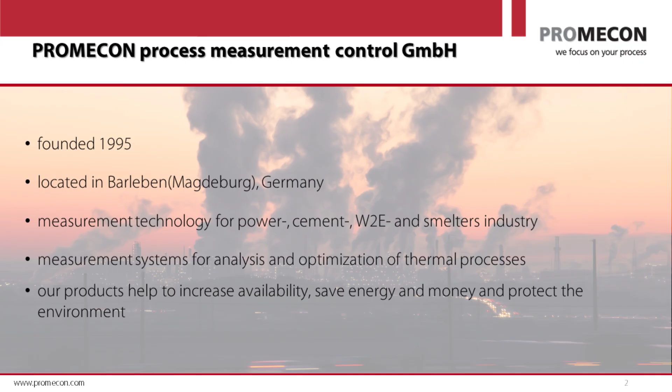Let me give you a complete overview of the industries that we're working in. It's power generation, waste to energy. Then in steel and iron making, we are into BOF, EAF, but also sintering and dedusting of plants. Then a very big part of cement making and limestone. And then, of course, the whole non-ferrous sector, lead, zinc, copper, whatever you name it. So it's a very wide field where we are active.

Today, I'm talking about digital, drift-free vector airflow measurement. Before we go on, we really need to recap a little bit on these three words: digital, drift-free, and vector. All three things are very important for your process, and I will explain why.

Before we do that, let's just have a quick look at a boiler. Boilers are very large machines. They're probably one of the biggest machines for energy conversion that I know. You can have boilers up to 100 meters tall, and these boilers are very prone to maldistribution of the airflows, which is used to combust the coal.

So you have a huge boiler, you measure your O2 at the back end, but what does it mean for the combustion chamber, which can be as big as a large room? You have 20 burners, several burner rows, and the air distribution across the burner rows is very uneven.

And with that come all the problems that you have in combustion: high CO, at the very same time high NOx, maldistribution of heat, pipe leakages, slagging, eyebrows, flame impingement, you name it. All the issues that you have in your boiler come from this problem. Even if you have clinkering coal in the bottom of your boiler coming from your mills, it can be as simple as a primary airflow problem, because the coal is not pushed through your pipes at sufficient velocity. So all the issues that you have in your boiler are driven by air maldistribution.

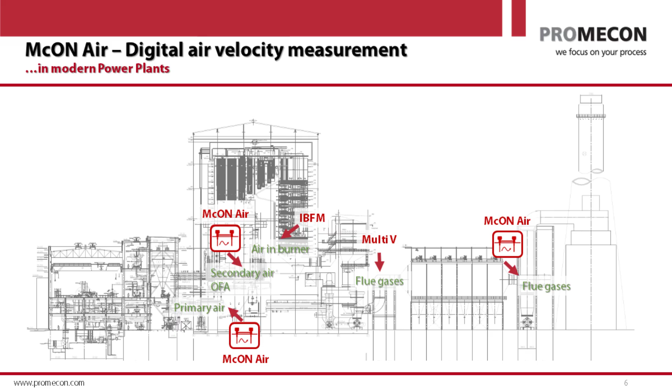So the next question is, why do people have such a problem with managing their airflow correctly? Well, the big issue here is that the airflows you are measuring are usually measured by a delta P device, a so-called delta pressure measurement.

And before we look into that and the problems, I would like to point out how the air and the process gas is processed in your plant. Everybody knows it, but it's important to look at this example again. All of the large boilers usually have a rotary air heater. The rotary air heater is basically shoveling the heat from the flue gas back into the fresh air. So a big portion of the heat that you would lose on the flue gas is put back into the fresh air stream by the rotary air heater.

The rotary air heater is a big carousel. It contains a lot of metal plates with thermal mass. So if the hot flue gas goes by these metal plates, it heats them up. And as this rotary air heater is slowly rotating like a carousel, the hot plates finally reach into the cold zone where they lose the heat again, and the cold fresh air is heated up.

During that process, the metal plates also agglomerate ash, so they are full of ash. And as the rotary air heater turns into the cold air zone, this ash is released, and therefore the ash is flying through the ducts now as preheated air. So the preheated air always contains ash originating from the rotary air heater. And as you can see, it has nothing to do with the leakage of the air heater, because the leakage goes from the fresh air side to the flue gas, from the pressurized to the negative pressure side, whereas the ash goes the opposite way. It simply always goes from the flue gas into the fresh air side.

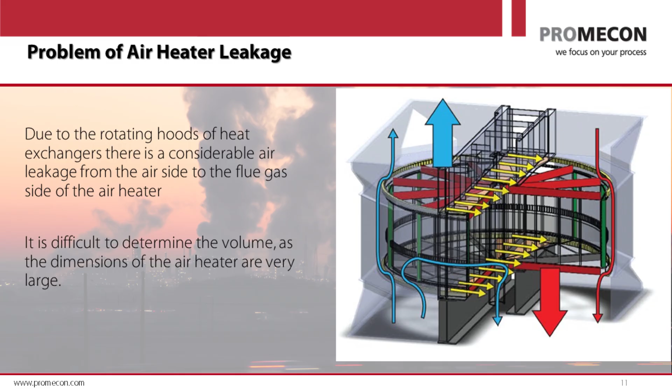So what you have is airflow with ash. And in some markets, such as India or South Africa, you have quite a lot of ash in your air because your coal contains so much ash. You can have coal with ash content of 30-40%, and then, of course, you have a lot of ash in your air. But even with coal of lower ash content, you will always end up with ash in your air.

What happens if you look at this is a typical airflow device, like you see it in hundreds, if not thousands, of coal-fired boilers around the world. It's an obstruction, in this case a venturi, but it could also be an airfoil, it could be an orifice, some obstruction in the duct which will create a pressure drop. And this pressure drop is then subsequently measured by a DP transmitter.

So you have a venturi, for example, or an airfoil. This creates a delta pressure, and you measure that delta pressure by two impulse lines, one before the venturi and one inside the venturi or inside the airfoil. The delta pressure is not very large, about 20 millibar or a few inches of water gauge. So we're talking here very small pressures.

Now, why is this important? Well, you take this pressure and according to the law of Bernoulli, you take the square root of the pressure and that is proportional to your flow. And you put this value into your controller, and the controller then controls the louver dampers so that your set point of airflow is reached.

So somebody puts in a set point, let's say 25,000 norm cubic meters per hour, and then the controller looks at the DP measurement and calculates the flow, and then changes the louver damper until the correct flow is reached. And that is a very important point, because that prevents the operator from seeing whether the DP transmitter is correct or whether it's drifting. An operator cannot see that because the controller will always correct the flow value to the set point. Now, why should the DP transmitter drift in the first place?

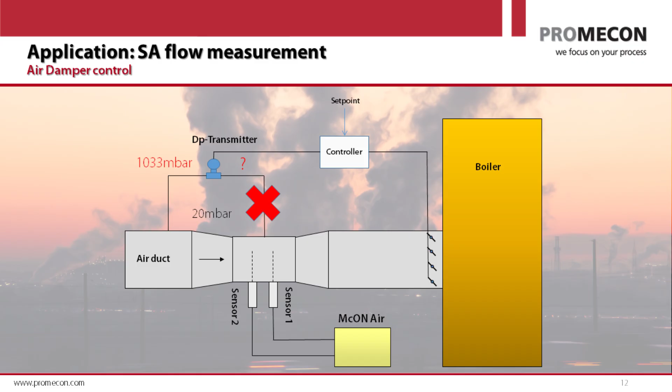Let me show you an example how this looks live with live data.

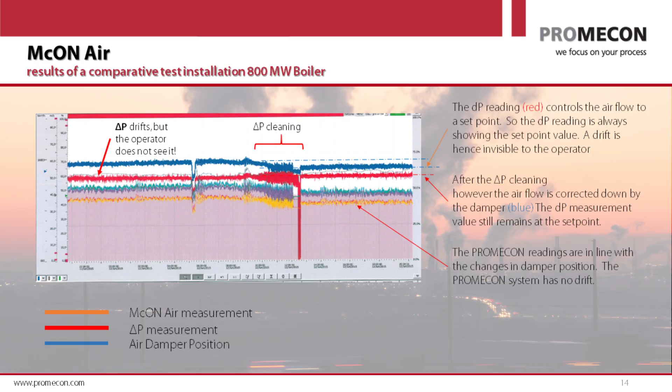Okay, that was problem number one. What you can also see here is the typical noise that I was talking about. The noise is basically a resonance between the flow measurement and the damper. Here you can see damper and flow measurement in both trends, and if you really look close up, you can see that the damper and the measurement dynamics is about 90-degree offset, which is basically a perfect resonance condition.

So what happens is the flow is too low, the DCS system opens up the damper, but the measurement does not follow, so only after some time it follows. It's because the impulse line is blocked, so it takes some time for the air to reach the DP transmitter. Then the DP transmitter overshoots, and then the damper overshoots. So it goes back and forth - it's a perfect resonance, as you can see here.

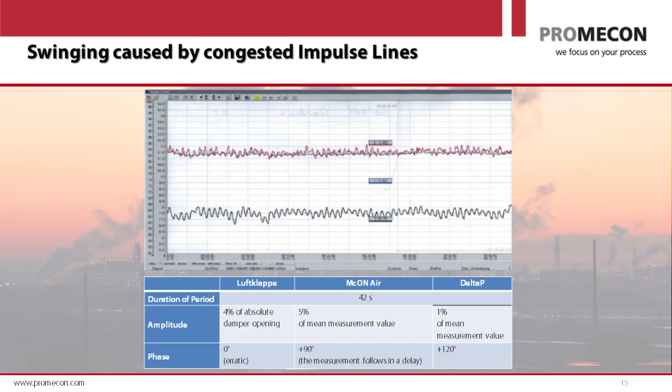So with our measurement, you don't see this - you don't see any drift, you don't see any blocking, because our measurement does not have this problem. Before I tell you how our measurement really works, I would like to point to another problem that you have. The other problem that you have is the vector, basically the swirl that you have in your measurement.

I was talking about the fact that our system is a vector measurement instead of a scalar measurement like DP. What is this problem? You can see here a manifold, and this manifold shows you that you have the air basically coming towards you in this lower rectangular, dark blue section. The air comes out of the screen towards you, and then in the middle manifold the air simply turns upwards. So it's a 90-degree bend.

And you can see no swirl. But the two manifolds, left and right, they are not just turning the air up, but they're also turning the air sideways. So the air is forced sideways and upward, and if you do that, the air has to fulfill sort of a screw-type movement.

Now, since the air has a mass and it has an inertia, it doesn't want to do that, so therefore it simply goes in a straight line, which results in a counter-screw movement. So you have in both ducts a swirl, pretty big swirl. Now, the outer ducts do not have this big swirl anymore. So to put a long story short, in every duct you may have a swirl or you may not have a swirl - you simply don't know it, and therefore you cannot calibrate for this.

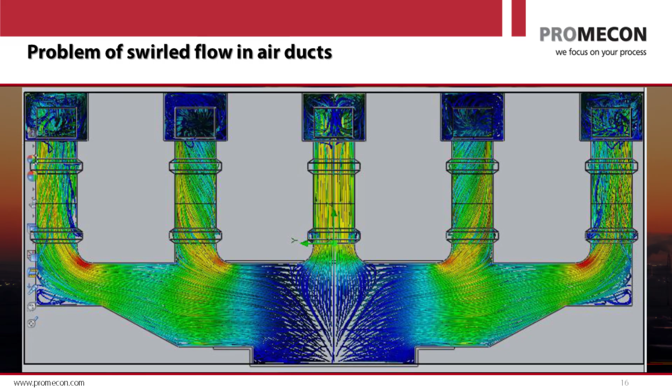That's a huge difference to any other measurement on the market. So now that we're finished with all the problems and why they are around, let's see how our measurement is overcoming these problems. What does our measurement do different in order to overcome these problems and work properly?

Well, first of all, you can see that our measurement has two sensors. We're not measuring the velocity with one sensor, but we're measuring with two sensors that are at different locations. And you might already guess, two sensors, different locations - well, there might be a vector involved between the two. But before I go there, let me explain the measurement principle.

The measurement principle means that we use two physical things to calculate the flow. The first one is we use an electrostatic signal which comes from the dust in your duct. So the dust that I have described as the enemy of all delta P measurements, of all thermal anemometers, this dust is our friend.

We use this dust as a tracer, and we use the electrostatic signal that the dust creates on our sensors. And the second principle is that we correlate the signal that we get on two sensors in order to calculate the time of flight between sensor 1 and sensor 2. That's basically how we do it.

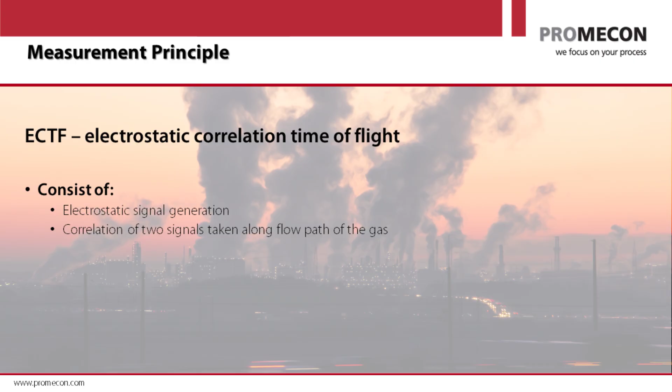Let me explain further. Here you have our sensor in the duct. You can see the antenna reaching into the duct. Now, in the duct, you have particles which are charged. These charged particles are basically the charged ash particles coming from your air heater. So they can be positively charged, they can be negatively charged.

In any case, in the vicinity around your sensor antenna, you will have different electric fields. Sometimes they are high, sometimes they're a little bit lower. And this is a function of the clouds of particles rushing by your sensor. So what you can see down there is basically the opposite charge on the antenna.

You remember Coulomb's law from the physics lesson. So we have the opposite charge changing over time. What we see then is an electric current over time. And this electric current is basically the fingerprint of the particles flowing by the antenna.

Let me show you more. If you have more particles, we have more fingerprints, right? So basically, as the particles rush by, we can measure this unique fingerprint on one sensor.

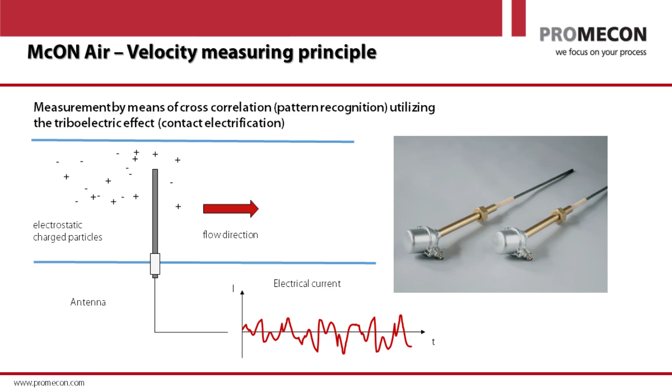Now, the next step is that we take two sensors. We have two sensors that are spaced about 300 millimeters, and they are oriented in the direction of flow. So we have an upstream sensor, and we have a downstream sensor.

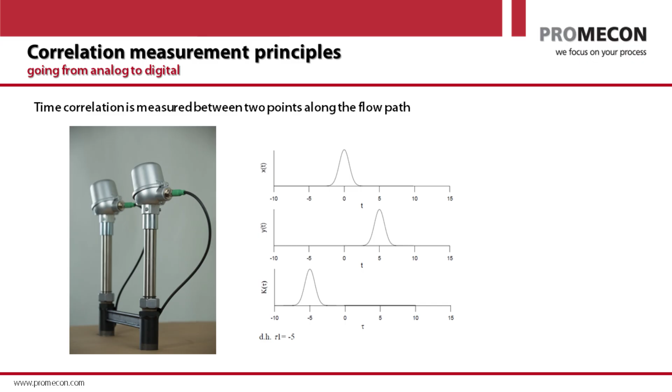Now just think about this. You have two impulses, impulse 1, impulse 2. You can see this in the two graphs. If you do a cross correlation of these two impulses, you will get a cross correlation function. And this cross correlation function will show you the time shift to the maximum overlap of these two impulses.

Let me show you this, how this really works. Of course, in reality, we don't see a single impulse, but we see a succession of impulses, a succession of clouds. But the thing is, since they are erratic, they are really random.

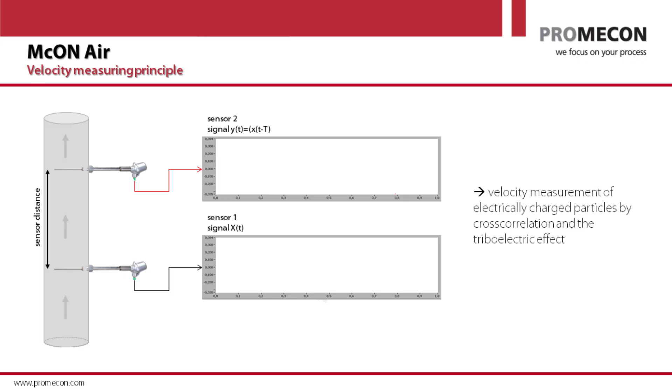So we have a random fingerprint. And if we put these two sensors, which are closely spaced, 300 millimeters, if we read out the signature of both, you can see they are very similar because they are not very far apart. However, the overlap is very low because they are time shifted, of course. Sensor 1 is earlier than sensor 2.

So what we do now is we put them into a cross-correlation filter, and this filter simply shifts the two functions towards each other in a digital form, and it just measures the overlap. And if you keep on doing that, you will see that there is one time where the overlap is maximum. This time is basically the time shift between the two functions, and it's identical with the time of flight of the particles between sensor 1 and sensor 2.

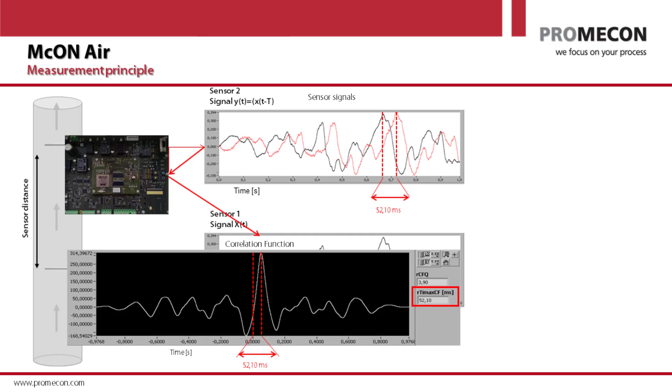So this is the time of flight of the gas between the two sensors, right? So you can see, for example, here - 52 milliseconds. So what we have now is we have a time of flight between two sensors. We have a distance of the sensor of 300 millimeters. So if you divide distance over time, you have meters per second.

What you do now is simply take the cross-sectional area of the duct in square meters, multiply square meters times meters per second, and you get cubic meters per second. So it's very simple to arrive at the actual flow. Now, how do you finally get to your STP flow, your standardized temperature pressure flow? You simply compensate for temperature of the gas and for barometric pressure. And that's it. So with a very simple time measurement, you arrive at a digital flow.

As you can see on the slide, this flow will never have to be purged, corrected, and recalibrated. The calibration of our system stands over the life of the system. If you put the system in a cement plant, in a coal-fired power station, in a steel smelter, it will continue to operate throughout its life with the same calibration. So there is no recalibration. And also for normal power station measurements, you don't have to purge or clean the sensor.

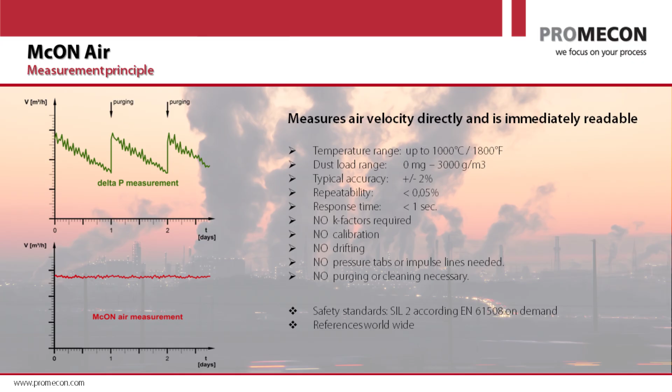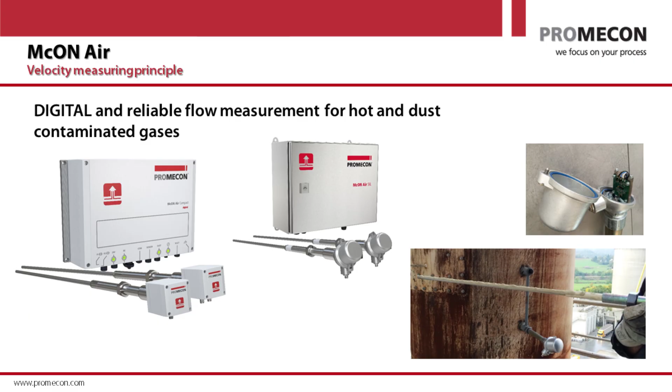Why is there no drift here? There is no drift because we don't care about the amplitude of the current that we measure. The only thing we care about is the change over time. So we only care about the time pattern and how quickly it repeats on the second sensor. And for that reason, it's a purely time-based measurement - something that would never be influenced by the amount of ash sitting on our sensor. That's the big strength of it - it's digital, always accurate measurement over the life of the instrument.

Now there's more, of course - I promised also the vector thing. If you have swirl in a duct, your gas flow is not actually going in a straight line, but it can swirl, it can have a lateral component. You can see here the orange line, which is not going in a straight line, but is offset.

As I mentioned, we measure time - a time difference between sensor 1 and sensor 2. You might ask, well, time is not a vector, time is just a scalar value. Yes, but remember, we divide the distance of the two sensors over time, and distance certainly is a vector. What distance are we assuming? We are assuming the distance that is basically the vector perpendicular on the two sensors. You can see the blue vector down there - that's the distance we are calculating.

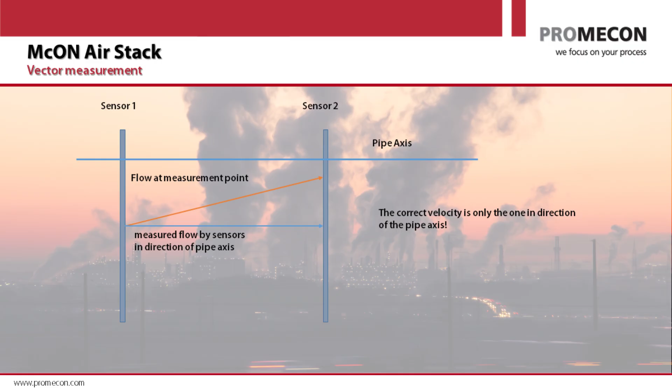So even if we have a lateral component, like in the orange vector here that you can see, the distance that we're calculating with is the vector between the two sensors. And for that reason, any swirl will not affect our measurement. Take a look - here you have the drawing, you have a typical swirl, and the swirl will also have a lateral component between the two sensors. But what we see is that the air is moving upwards, and we can detect the same statistical pattern on sensor 2, but we only divide by the vector that is orthogonal or perpendicular on the two sensors. For that reason, the swirl component is simply not seen. And that is another very big advantage.

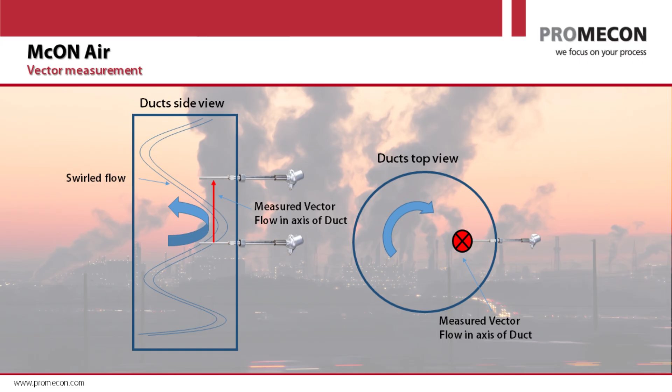Okay, that brings us to the end of the working or measurement principle. There's one thing I'd like to add for you as power station people. You might have asked yourself, what if I don't have any dust? Everybody of you knows how to start up a coal mill, and if you start up a mill, you are also using cold air, right? So you open up your cold air damper - there's no hot air, just cold air in order to purge the mill, to start the mill up.

The cold air is not going through the rotary air heater, so you might have cold air that is not carrying a lot of dust. The question is then, if I don't have any dust, how can I make this cross-correlation measurement properly? The answer is the range extender. We have invented and patented this system to be able to ionize the air that passes by this range extender, and we do this with a small high voltage pulse.

It works a little bit like a spray electrode in an electrostatic precipitator. The only difference is that the power levels we need are very, very small - just milliwatts. But these small ionizations of the air will subsequently be going over the two sensors.

And on the sensor, they will also leave a blip - let me call it a blip. You can see it on the right-hand side. You have the electric pulses on the left-hand side, 3 spikes, and on the right-hand side, you have 3 blips that you can see.

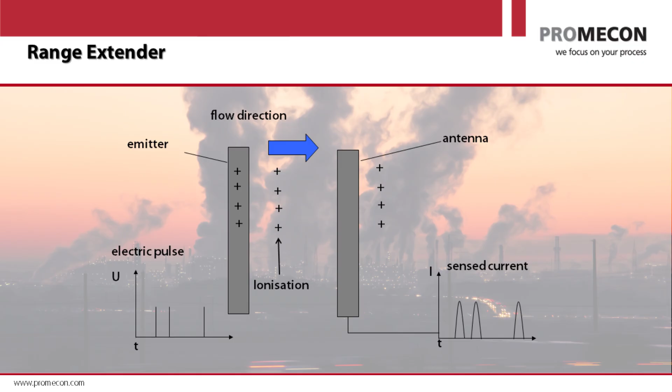The range extender has 2 big advantages - that's why we also call it range extender. First of all, it extends the range of dust that we can measure down to absolute zero. So we can measure high dust levels, and if there's absolutely no dust, we can still measure. We will always be able to measure.

The second thing is that the electrification of the dust is also depending on the velocity of the gas. So when you have very slow gas below 7-8 meters per second, the electrification gets very low and the cross-correlation is harder to find for the system. The range extender changes that because it always provides a constant ionization of the gas, and so it also extends the low velocity range of our measurement down to 3 meters per second.

And that's very significant because now you can measure very slow airflows. For example, you switch off a burner row - you only have cooling air going into this burner row. Now this cooling air is very, very slow. With a delta P device, it's impossible to measure.

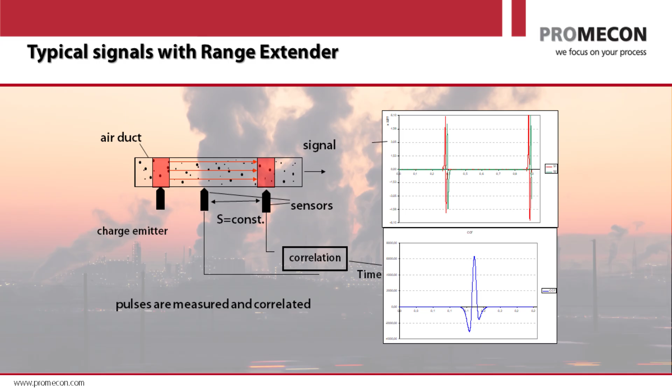With our measurement, it's a time measurement. What happens if the air gets more slow, if we have a slow gas flow? Well, then the measured time difference goes up. So the lower the airflow, the larger the time difference becomes, and therefore the higher the resolution of our measurement. So you can safely say that even very low velocities are measured very, very accurately by this technology. And that is another big advantage for you in the measurement.

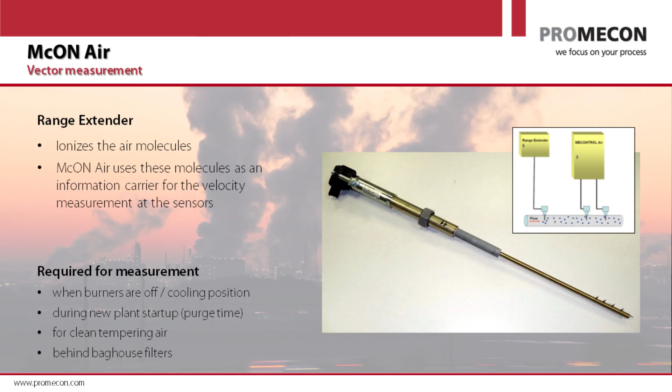So here you can see a range extender, how it looks like, typical. It pretty much looks like a sensor, and you put it upstream of the two sensors, and it runs completely autonomous. It has no connection to the sensor whatsoever, it just keeps on marking the gas flow all the time with the ionization.

So let's have a look - how does the system look like? This is a typical one-channel measurement system. You have the measurement box, you have the two sensors, and the measurement box takes in the power supply, it takes in the raw signals from the sensors, and out comes your 4 to 20 milliamp signal that is typically then sent to the plant.

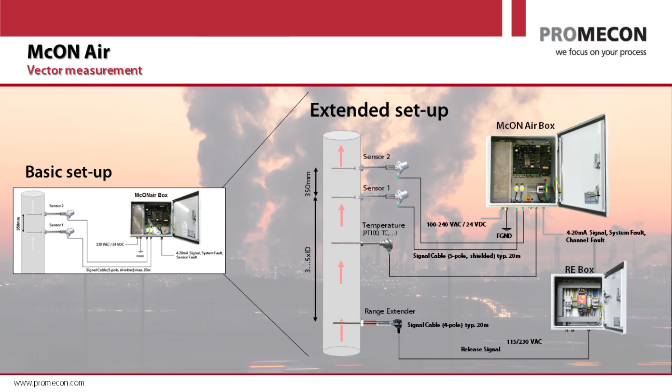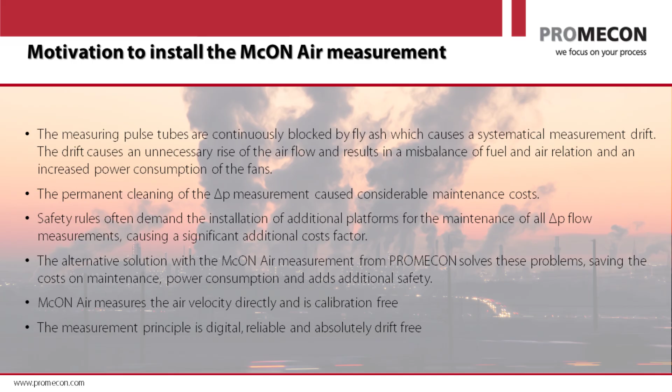So just to sum up the main reasons for measuring, the main problem you have is drift. All of your measurements drift and your operators cannot see it. You may sometimes have mill trips, and that's when you measure it, but it's usually hard to see. On the secondary air, the OFAs, the SOFAs, all these airflows are hard to see whether they're correct. If you have our measurement, you can be sure that the OFA, SOFA, and secondary airflows are measured correctly, and you will not have to climb up the boiler every year and check for the correct flow. Our measurement is digital, it will never drift. That's the main advantage of it. And then, of course, all the other ones I've mentioned afterwards.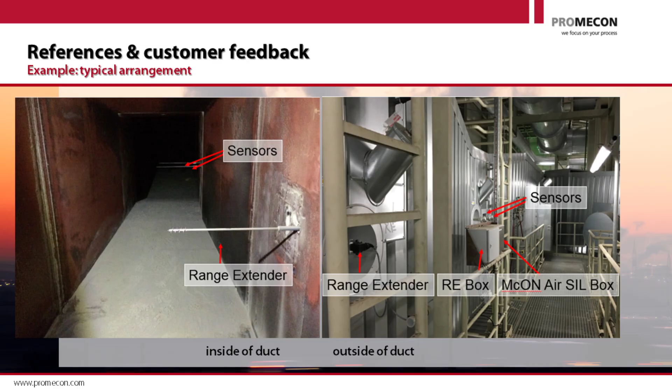So they finally replaced this delta P measurement with our digital airflow measurement from PROMECON. You can see here the box, the sensors, and the range extender. The other picture on the left-hand side shows this duct from the inside. Here you can see the Venturi and how the sensors stick into the duct and how they measure. They have replaced all of their primary airflows, secondary airflows, and overfire airflows with our measurement.

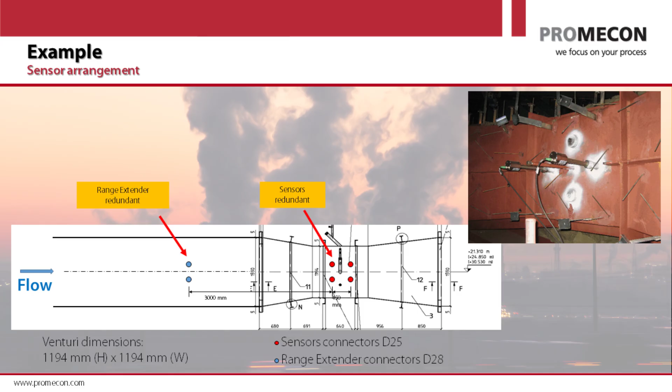Here's another plant, a Mitsubishi Hitachi plant in Germany where our sensors came in from the start. They still built in a Venturi because they wanted to be sure they could replace our measurement with something else if it didn't work. This is station Walsum. It has been working now for over 10 years and the customer is extremely happy. The whole power station is controlled by our measurement and nothing has ever been replaced by something else.

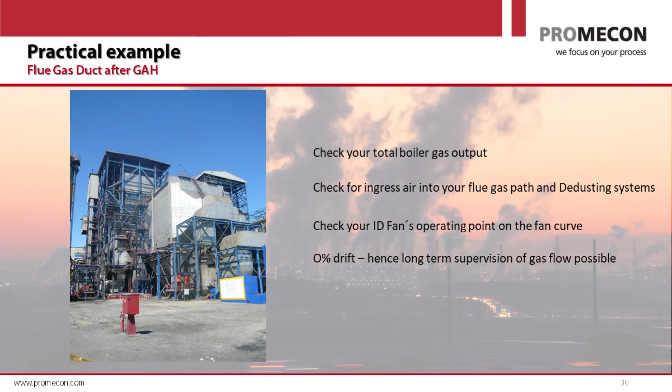Here you can see another example of a flue gas measurement. We have done total flue gas measurement on these boilers in order to optimize the ID fans and to check the efficiency improvement. You can see how this looks, total gas flow measurement out of the boiler. This has also been done in other plants in South Africa and in Asia, and this is also a very important part of checking the distribution of your airflows.

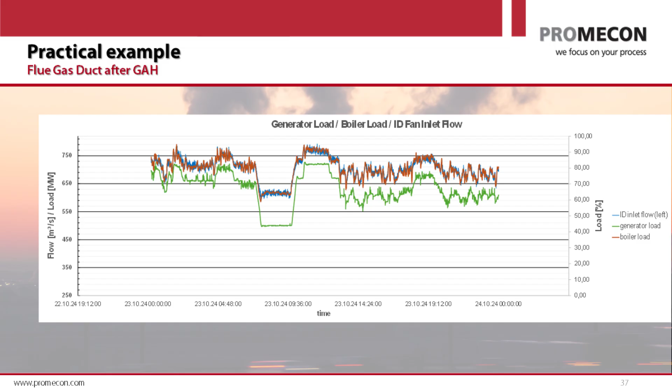Some people in the US have done this on their flue gas duct in order to measure the distribution of the flue gas into their scrubber units. So they have, let's say, two boilers and three scrubber units, and both boilers feed into the three scrubber units. They simply wanted to see how is my flue gas distribution and how can I control my scrubber in order to optimize my operation.

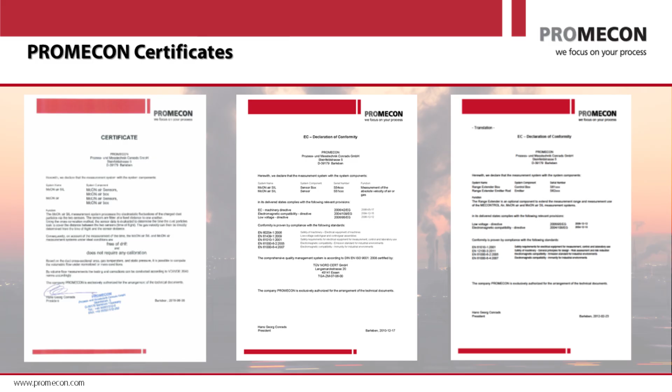And this brings us to the typical certificates. We offer this measurement normally with the conformity of technology, CE certificate. We also have an SIL certificate. Some boiler operators in Europe especially want to have SIL2, Safety Integrity Level 2 rating, and our systems are rated SIL2. So for boiler safety, if you need our systems for boiler purge and boiler startup, this can all be done using our systems, and the SIL rating is also part of our system.

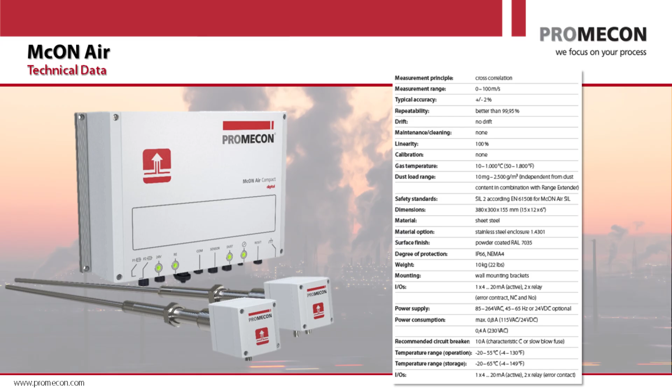I would spare a little bit of the details for later if you have more questions. Typical setup here, you have a single box with typical IP66 or NEMA 4 ratings, and different sensor types that you can go in. We'll be happy to provide this to you.

So that brings me basically to the end of our presentation and to the Q&A session. I'll be happy to take your questions. Thank you very much.

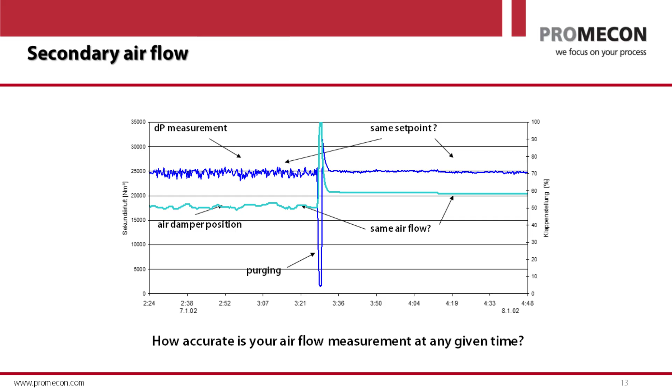The next question is: what is the recommended maintenance interval for your system, and what does routine maintenance involve? As I mentioned, delta P devices drift — our systems do not drift. So there is no regular recalibration and also no regular cleaning necessary for our system.

We have many customers that don't look at our system for years. Of course, we do not recommend that. If you have a boiler overhaul, it's always good to send someone out to look at all the sensors — are all the cables intact? Is there any issue, are any sensors bent or damaged? Also pull out a sensor and check there's no excessive wear. Usually these sensors do not wear; they don't wear within 10, 15 years. And even if you see slight signs of wear, the impact on accuracy is nil — it's zero. But you should have a look at some of these sensors.

Usually when we have people running a boiler with 20 measurements, every now and then we get a request to send them 1 or 2 spare sensors to replace this and that. So that is the typical thing. There is no regular maintenance, every week or every 2 weeks, that you have to do.

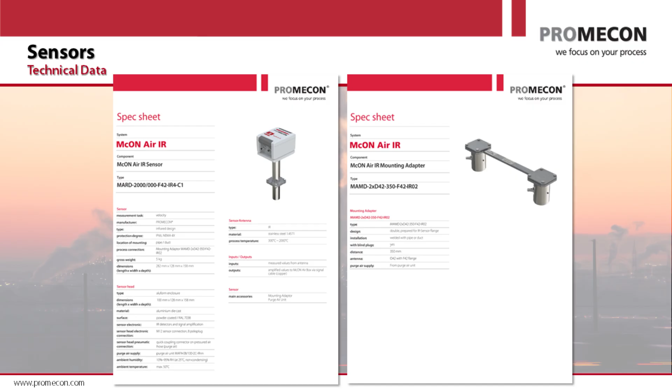No, it is not, but the measurement can easily be cross-checked with a grid measurement, for example an S-pitot or a normal pitot grid measurement as specified in the relevant codes. You have ASME codes for correct grid measurement, and in Germany you have VDI guidelines for that. In the power stations I mentioned, German, Belgian, Dutch, we have been tested against these grid measurements according to the norms and standards. So our measurement can very well be compared to the norm, but in contrast, if you leave our measurement running for weeks, it will always be accurate. Especially for acceptance tests, this is very important.

Gas flow measurement is one of the biggest black holes in performance testing.